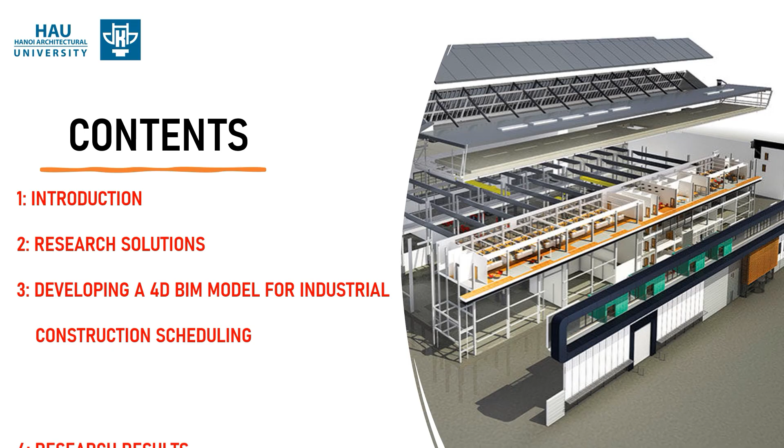Our presentation is organized into 5 parts. First, an introduction of BIM adoption. Second is our research solution. Third, the development of four-dimensional BIM model for industrial construction scheduling. Fourth is our research result. And finally, our conclusion. Let's begin with the introduction.

Building information modeling, or BIM, has been adopted globally at an increasing rate over the past decade. Many countries have moved from voluntary use to mandatory requirement on public projects, recognizing BIM in improving design coordination, reducing error, and enhancing efficiency across the construction life cycle.

In Vietnam, this trend is reflected in a clear implementation roadmap. The international standard ISO 19650 provides the foundation for information management, while Decision 258 and Decision 347 issued by the Vietnamese government establish the national roadmap for mandatory BIM application in construction projects.

Based on the BIM implementation roadmap issued under Decision 258 on March 17, 2023 for publicly funded and state-owned projects, mandatory BIM application applies to grade 1 and special grade structures from 2023 and grade 2 and above structures from 2025. For other funding sources, private or foreign investment, mandatory BIM application applies to grade 1 and special grade structures from 2024 and grade 2 and above structures from 2026.

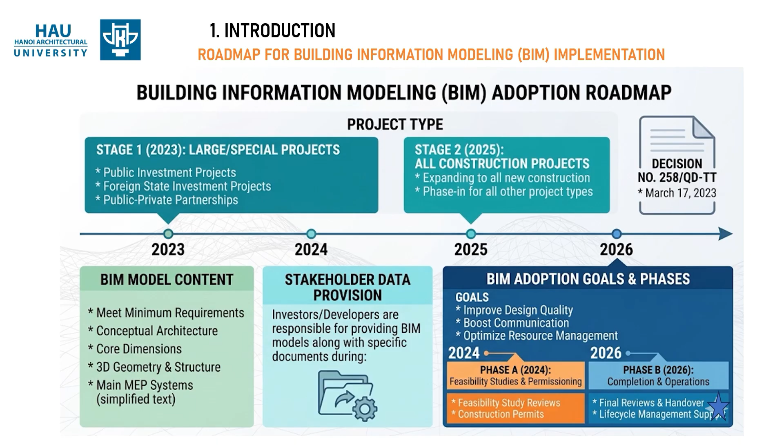Next part is research solution. We identify both subjective and objective advantages favoring four-dimensional BIM adoption in Vietnam. On the objective side, BIM is considered a flagship technology for the global digital revolution, earning strong confidence in its potential from industry experts. Vietnam can leverage valuable lessons learned from international BIM projects. The government highly supports BIM adoption by establishing regulation, learning forums, and mandatory implementation policy.

On the subjective factor, Vietnamese people are naturally agile and quick to adapt to new innovation. The young, enthusiastic generation of engineers tend to rapidly catch up with global technology. Based on the advantages, we propose a structured four-dimensional BIM implementation process for construction scheduling, which links the three-dimensional geometric model with time-based schedule data to simulate the entire construction sequence.

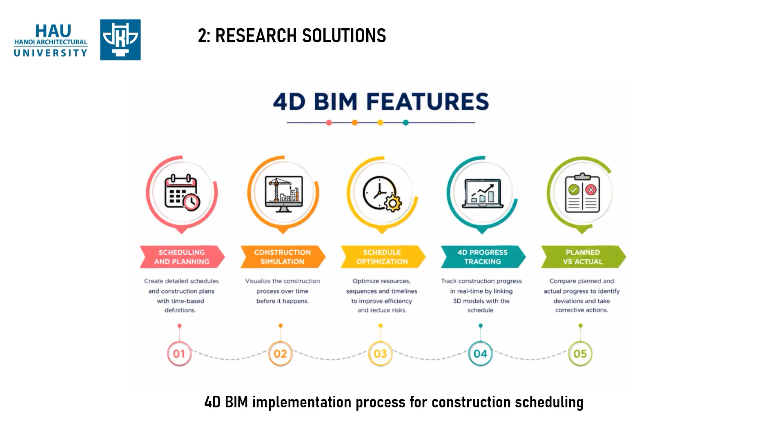Several software platforms support this process, including Navisworks, Synchro, and Assemble Systems. Four-dimensional BIM allows users to integrate three-dimensional design models with schedule information, providing an effective approach to managing both information and time throughout the entire project lifecycle.

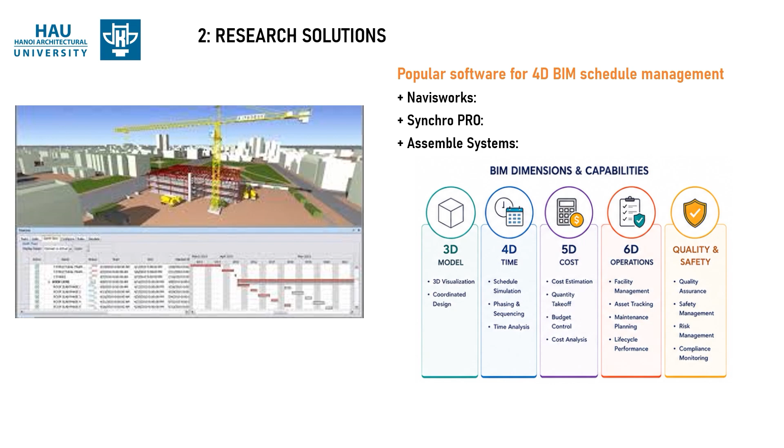Now, let's look at how we develop our four-dimensional BIM model for industrial construction scheduling. Our development process consists of four main stages: three-dimensional modeling, detailed construction scheduling, model schedule integration, and simulation, which I will walk through one by one.

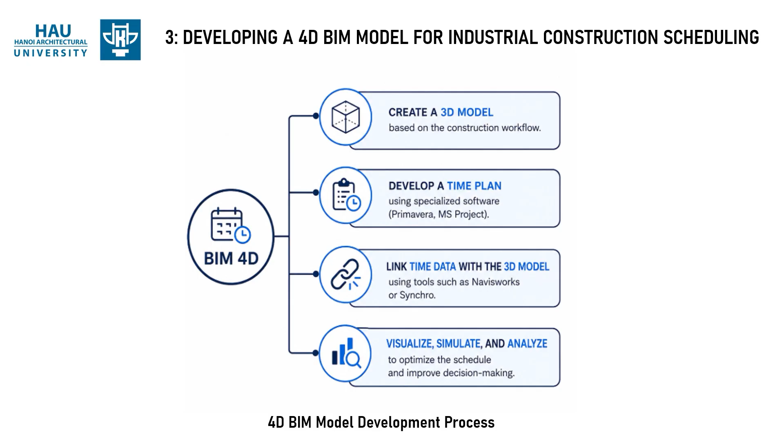The architectural model has precisely controlled spatial area and volume and supports multidisciplinary coordination, while the structural model ensures load-bearing capacity and stability, critical for industrial projects, which typically carry heavy machinery loads and feature long structural spans. We elaborated and built the model directly from two-dimensional drawings with a clearly agreed level of development to ensure sufficient detail for later analysis.

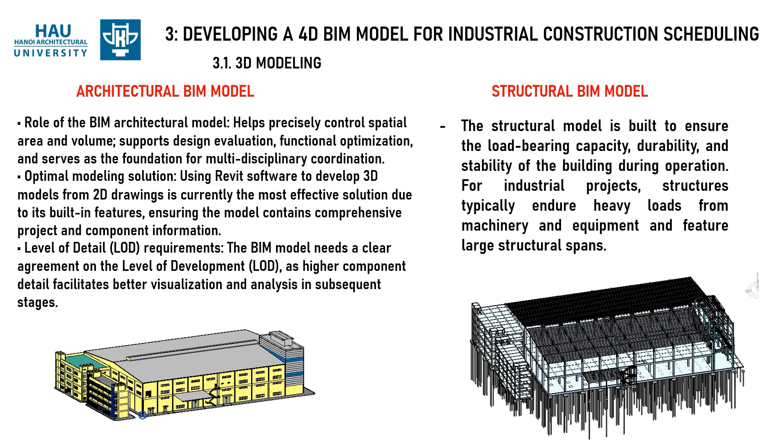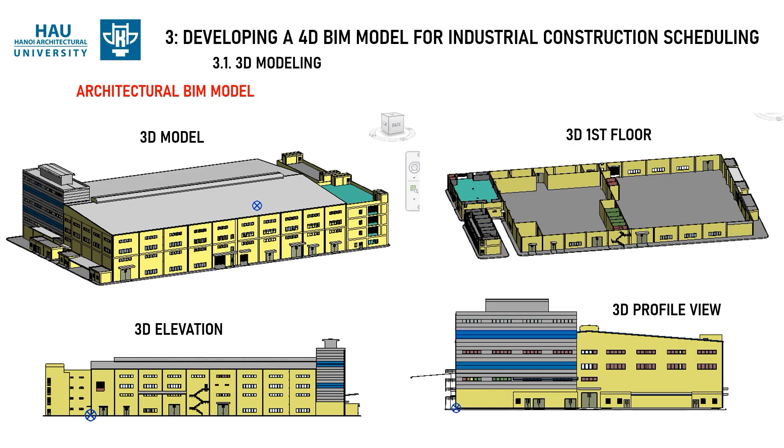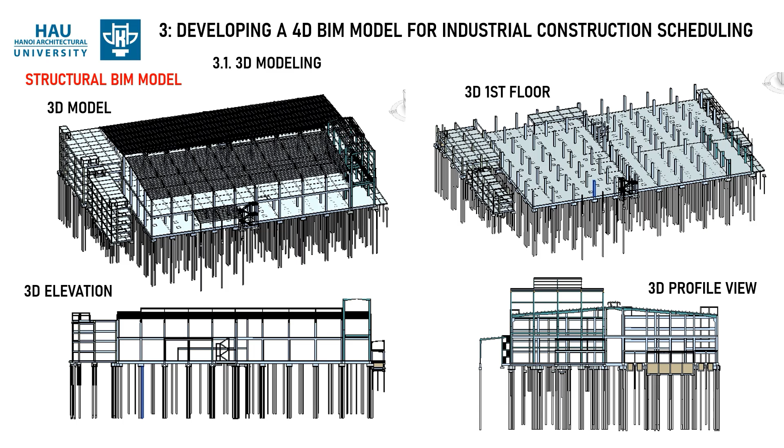Here you can see the resulting architecture model, including the first floor plan, elevation, profile view, all developed within a coordinated three-dimensional environment. Similarly, the structural model was developed with corresponding floor plan, elevation, and profile views, ensuring full alignment with the architecture design.

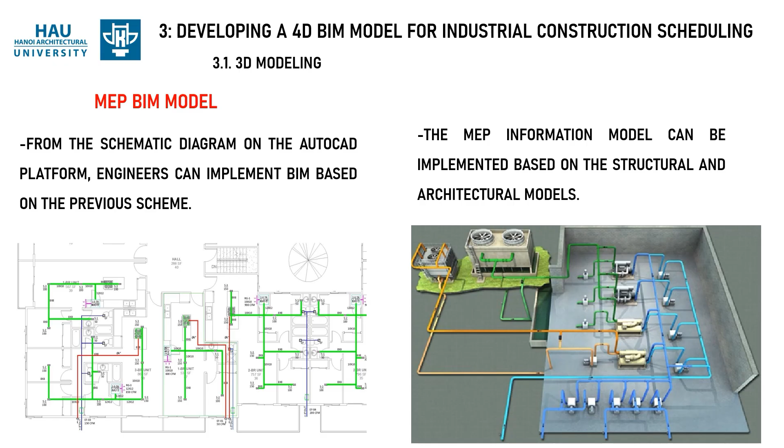The MEP model covering mechanical, electrical, and plumbing systems was then developed from AutoCAD schematic diagrams and built on top of the structural and architecture model, ensuring consistency across all disciplines. With the three-dimensional model complete, we move to detailed construction scheduling.

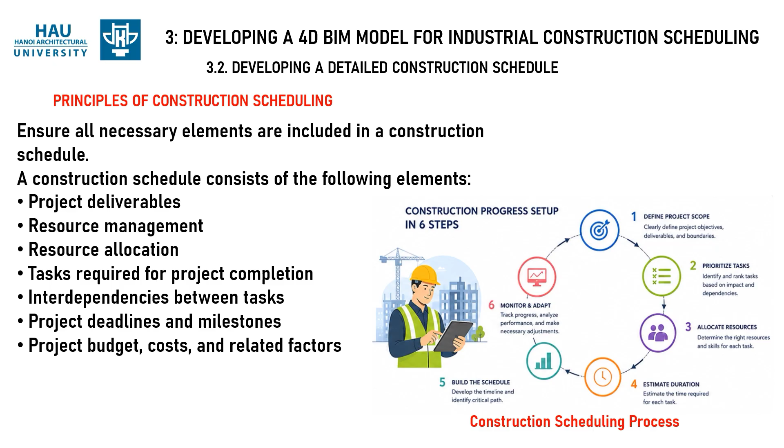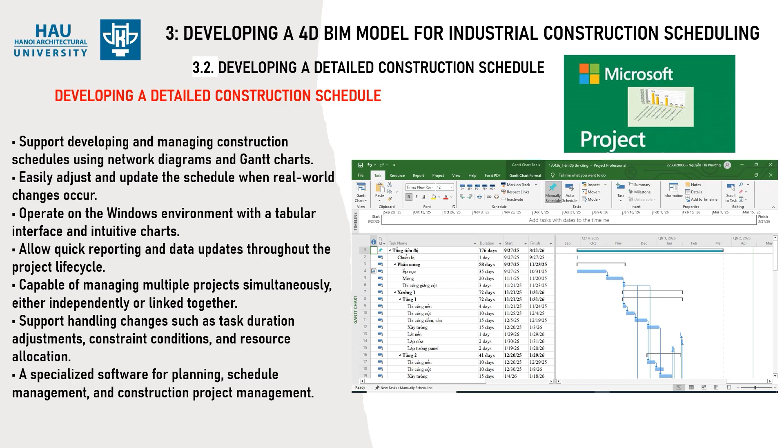A proper schedule must include project deliverables, resource management and allocation, the tasks required for completion, interdependencies between tasks, deadlines and milestones, and budget-related factors, all essential for accurate and reliable four-dimensional simulation. We use specialized scheduling software to build and manage the schedule through network diagrams and Gantt charts. This allows us to easily adjust the plan as real-world changes occur, generate quick reports, and manage multiple projects while handling changes in task duration, constraints, and resources.

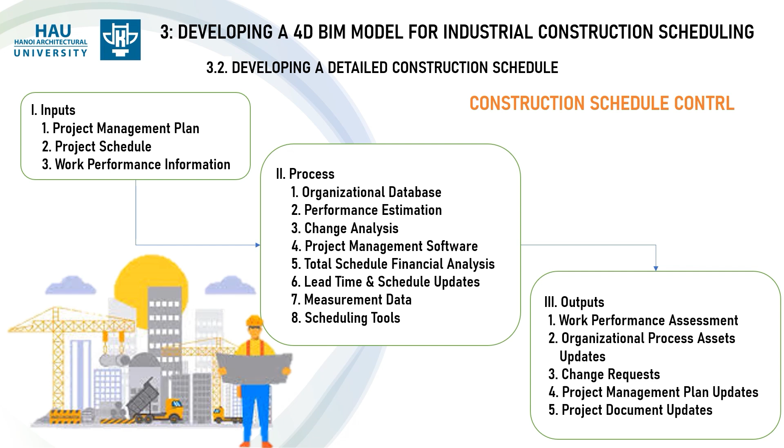Schedule control follows an input process output framework. Inputs include the project management plan, project schedule, and work performance information. The process involves performance estimation, change analysis, and schedule update. And outputs include the performance assessment, change requests, and updated project documentation.

We apply this framework in practice using Synchro software on a real project by Licogi company. Synchro links the schedule with the manpower, materials, equipment, and construction space, enabling easy comparison against the baseline plan, visualizing the entire construction process, and integrating with tools such as Oracle Primavera and Microsoft Project.

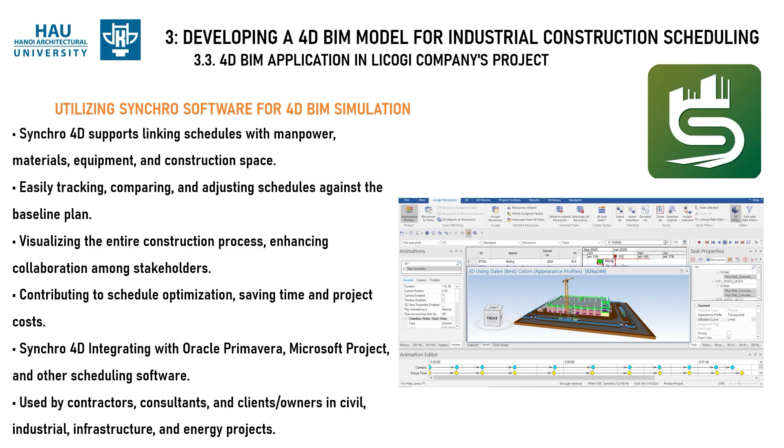The final four-dimensional model was set up by combining the three-dimensional architecture and structural model, linking them and running a construction project simulation, giving stakeholders a clear time-based visualization of the entire building sequence.

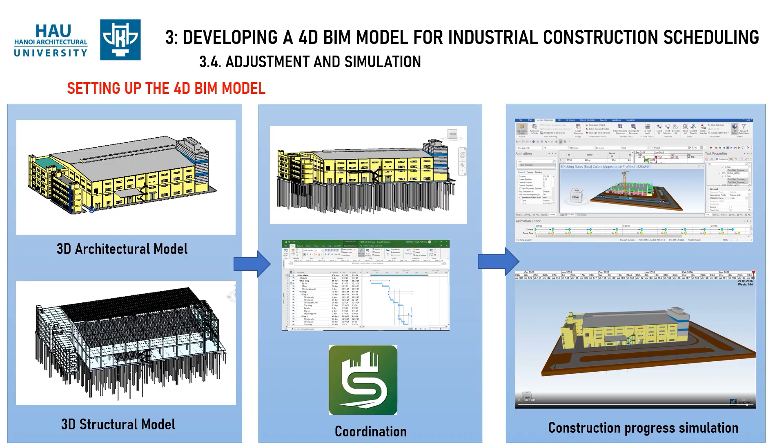Our research shows 6 key benefits: visual schedule management that helps track and adjust progress, early clash detection between structural and architecture and MEP systems, risk mitigation through fewer errors and delays, optimized use of resources and site logistics, stronger coordination among the stakeholders, and a solid foundation for future 5-dimensional and 6-dimensional BIM application, covering cost and facility management.

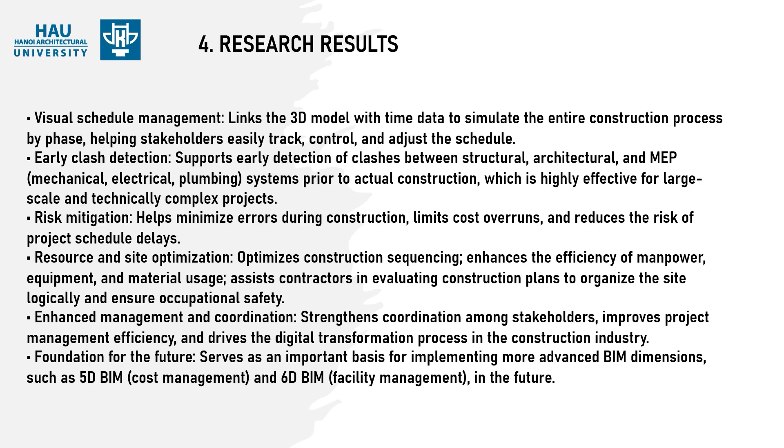Effective coordination requires clarity among all key stakeholders: the project owner, architecture and structural design consultants, the BIM coordinator, the construction unit, and other related parties. We establish the Common Data Environment, or CDE, using Autodesk Construction Cloud, which improves productivity, saves time and cost, strengthens data security and consistency, and enables online viewing, collaboration, and approval, all in one centralized platform.

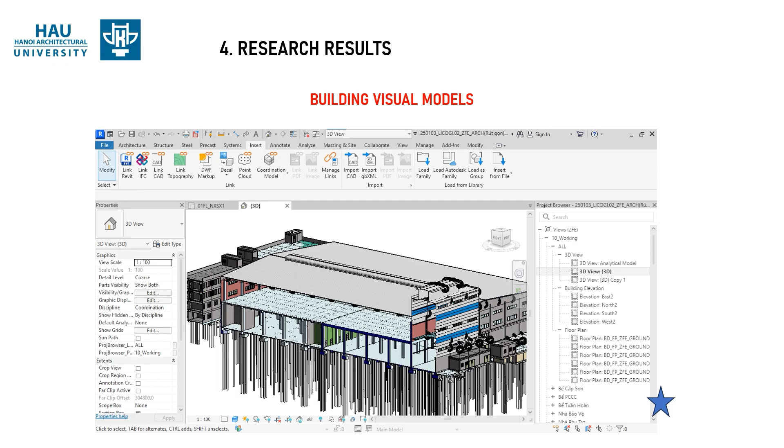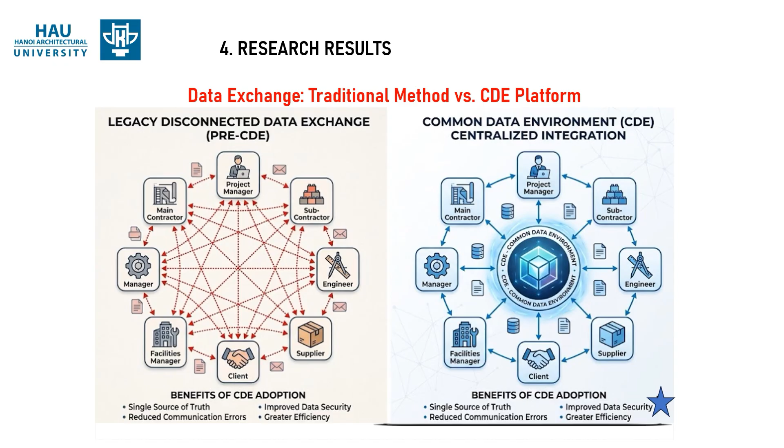Compared to traditional data exchange methods, the CDE platform greatly simplifies building the visual model, design coordination, and clash detection, with easy and convenient drawing management. Our study confirmed that stakeholder coordination is essential for successful four-dimensional BIM implementation.

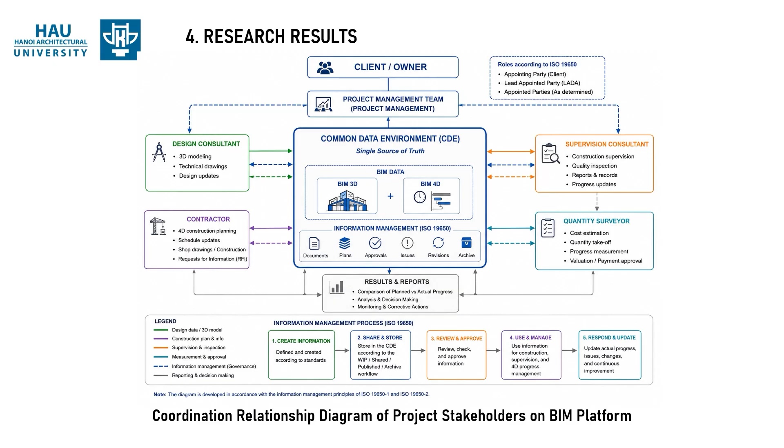Based on ISO 19650, we propose an information management structure centered on CDE, where the client and project management board serve as the primary coordinator, connecting designer, contractor, and supervisor through a single source of truth. The diagram summarizes the coordination relationship among all project stakeholders on the BIM platform.

In conclusion, our four-dimensional BIM approach visualizes the construction sequence, optimizes on-site management, enables flexible online collaboration, and supports real-time decision-making, while requiring standardized data and personnel skills in tools such as Navisworks or Synchro.

After this period of research and analysis, I'd like to invite everyone to watch a short video. This video demonstrates the practical application of four-dimensional BIM simulated using Synchro software, to give a clear look at how scheduling and the three-dimensional model integrate in real time.